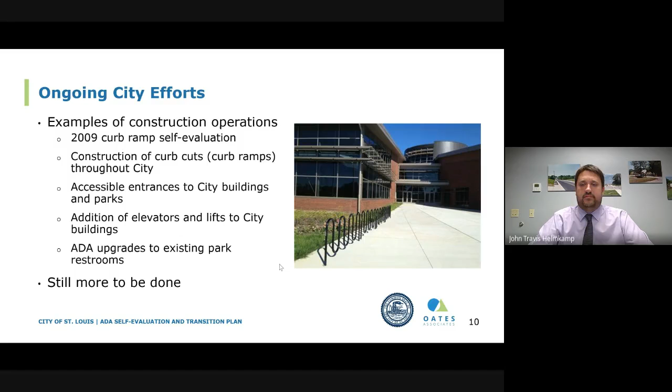The current city self-evaluation efforts too are very important, that we look at the transition plan as it covers, and the self-evaluation as it covers all aspects of the city government. The ADA transition plan covers all these aspects and also puts in place solutions to creating accessibility.

One of the things we wanted to do too, recognizing the great work that had been done in the past by David and others, is to consolidate all the past ADA efforts as well as develop new guiding documents so that future efforts done by the city would be able to follow one single code for accessibility, and that would incorporate local as well as federal and state code into one code, so that it would be predominant for everybody to follow throughout the city. Next slide.

Right now, we've so far been able to do a partial self-evaluation of the city programs, activities, and services, which is covered under the ADA, that the Title II entity or city government must be looking at. I think you can respect and understand the breadth of what that would be across all the programs, services, and activities of city government.

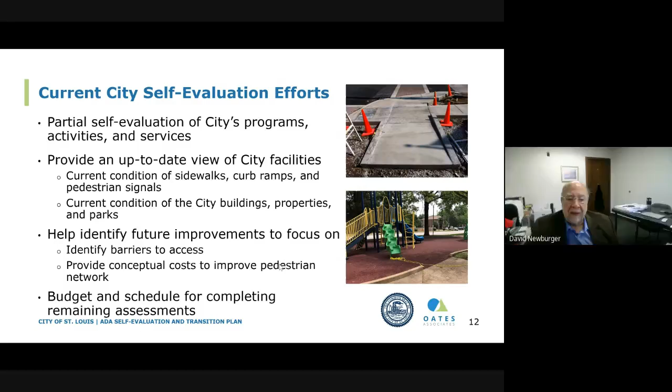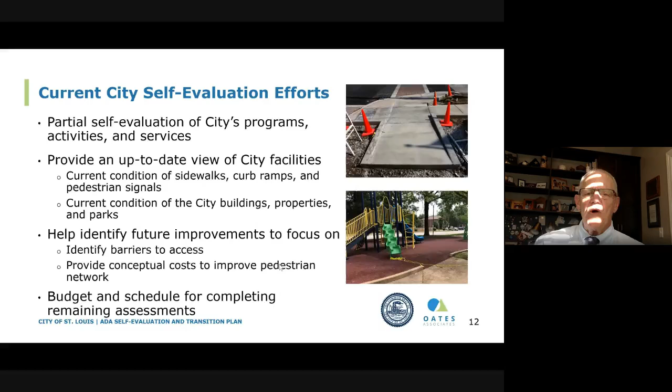Any other questions or comments at this particular time? I think at this point I'll turn it back over to Travis. Okay, thank you very much, Jim.

We've spent a lot of time so far talking about how this is going to be a long-term process, but one tangible aspect we're really looking at is, as stuff is being built in the city, let's make sure that it's being built compliant and built correctly. To that end, that's part of the review of city policies, taking a look at the current policies and whether there are changes we can make to have consistent policies across the various city departments.

Ultimately, that all starts with establishing the ADA criteria to determine compliance - what criteria the city will use to determine whether something is compliant or not. One big benefit of that is it gives us an opportunity to look at post-construction inspections, to really look at what was actually built out in the field and make sure the final product matches what was intended.

And this applies not only to city projects, but also to developers. By giving them consistent standards and consistent expectations, it's going to lead to the city ultimately getting a better final product for what developers are building on city right-of-way.

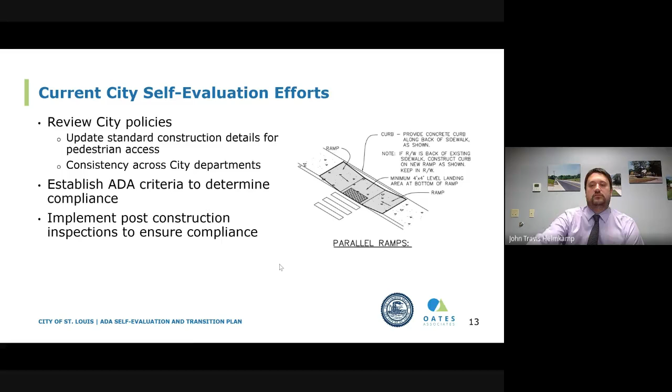Talking a little bit about the pedestrian assets themselves. As Jim previously mentioned, we're only able to survey a portion of those as part of phase 1. But in that portion we're surveying, we're looking at assessing the sidewalk segments, the curb ramps, as well as the pedestrian traffic signals. As part of the 170 miles we've already done, we've completed assessments in every single ward in the city.

We've also focused on getting representative samples of the broad array of sidewalks that exist throughout St. Louis - from heavy pedestrian streets such as Grand or the downtown area, to getting into some of the local streets and taking a look at the condition of the sidewalks along those local streets.

Ultimately, the reason we're doing this is because we're looking to develop a way to score this data, to allow the city to identify which sidewalk segments are having the greatest impact on people's ability to get around the city. The way we're proposing to go about this is a two-part scoring system.

The first part is what we're calling a citywide priorities map. We think this is an opportunity where you can really help us in that development, where really what we're looking at is where people are trying to get in the city. When a pedestrian walks somewhere, where are they trying to go, and also where are they starting from?

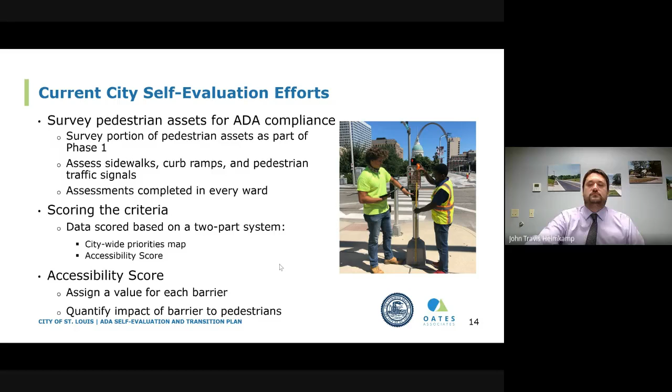Going back to the citywide priorities map for a second, that's based on two different pools of data that we collected. The first pool we looked at was what we call pedestrian traffic generators - areas in neighborhoods that we know people are trying to get to.

If you have the PowerPoint up in front of you, look at the right-hand side of your screen - this is Grand, in the Dr. Martin Luther King area of North City. Highlighted here are some of the different traffic generators that people are trying to get to.

A good example is the MetroBus routes. One thing we've heard over and over, especially from the disability community, is that if I can get access to the bus, I can get access to the rest of the city. So that's one of the key pedestrian traffic generators we're looking at - pedestrian routes along those bus routes.

Another good example of pedestrian traffic generators are city buildings, schools, parks, and especially commercial corridors. Not only is that where people are walking to shop and buy goods and services, but there's also a lot of employment along those corridors as well.

The second part of the scoring system we looked at was socioeconomic data, received from the East-West Gateway Council of Governments. We used that data to identify parts of the city where there is a likelihood that people are walking to get to work or goods and services - really just the possibility of increased pedestrian traffic.

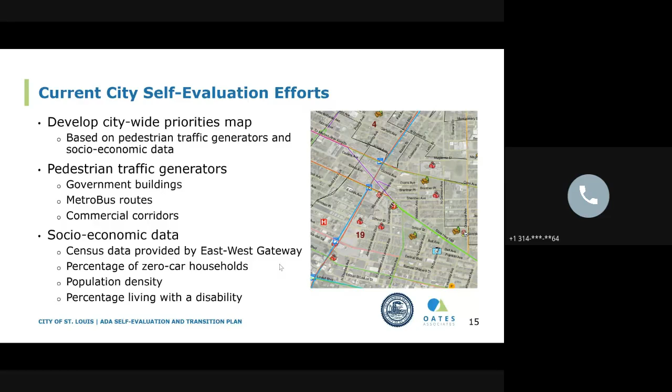When we're evaluating driveways, sometimes there's a tendency to make a big slope in them that goes right across where the sidewalk would be. The technical requirement is that the portion that is sidewalk should be at the same slope as any other sidewalk, which the standard calls for 2% - a very slight slope, enough to get the water off the sidewalk and not tip people over.

All right, very good. One more for now.

So one thing we are looking at is, number one, the minimum width of the sidewalk. We also look at what we call the space, which is the distance from the back of the sidewalk to the face of the curb. The federal government and the city, following those standards, have minimum requirements for those widths, with the goal of providing an opportunity for someone to get as far away from the curb as possible, not only for water but also for general safety.

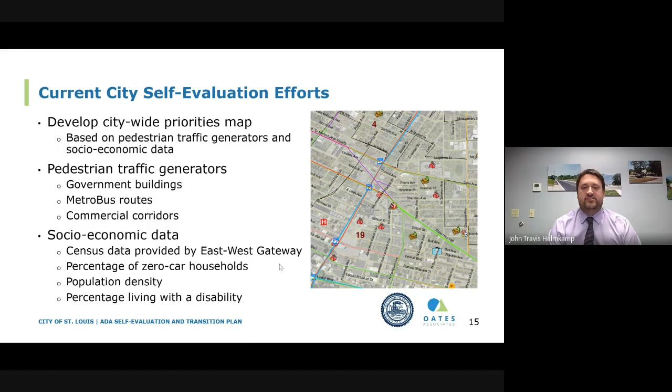Okay, hearing no other questions, we'll move on to the next slide. Again, if anybody has any questions, chat's a good place—feel free to interrupt. Moving on, we're now going to shift over to the city buildings, properties, and parks.

Ultimately, we're only able to look at select buildings. We are focusing on those buildings that we know receive a lot of heavy pedestrian traffic, including City Hall, 1520 Market, community centers, and a couple of the large city parks. Those are the buildings we're looking at as part of phase 1. Again, this is a good opportunity—we want to make sure we're not missing buildings that we know the public uses on a daily basis.

So if anybody has any buildings that they can think of, either they know they have challenges getting into, or that city residents use a lot, we would love to hear from those as well.

Ultimately, our evaluation of these buildings, properties, and parks starts with how people are arriving at the site. That goes beyond just automobile traffic and parking in the parking lot—it also includes if someone is arriving by bus, how they travel from the bus stop to the city building. If someone is using the public sidewalk to get to the city building, how do they access it from that sidewalk? Is there a dedicated sidewalk leading them there, or do they have to use the driveway? Because ultimately, the first step in providing those accommodations is being able to get inside the building itself.

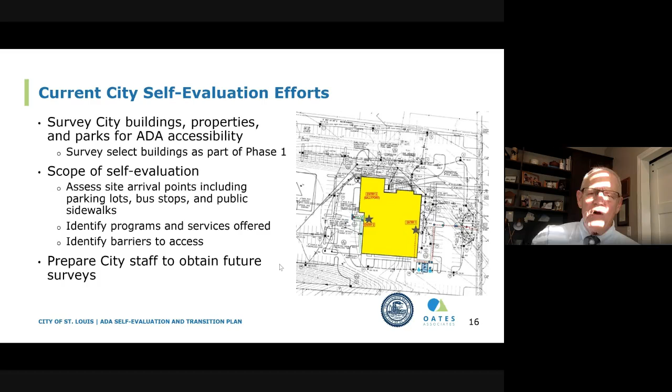Well, and let me add to that, if I may, Jim. When we're talking about our programs, my office will help make sure that everybody gets access to something, so we don't have to wait—that's today's stuff. If, for example, somebody is having trouble getting a audio bill, and they let us know, we would work with that agency. If somebody is holding meetings in buildings that you can't roll into, we would seek that they change where they put their meetings, and we would have a direct conversation right now. So we want everybody, even though we've got all this physical stuff to worry about, to be fully involved and have the full opportunity within the community.

Thank you, Travis. And I think really that's one of our key goals for today, is that you guys, as those neighborhood leaders, know that the Office on the Disabled is ready and certainly willing to assist the residents of the city to get access to things like that. And really, it's not only talking about the ADA transition plan, but also a bit of education on those programs and services that are available to city residents.

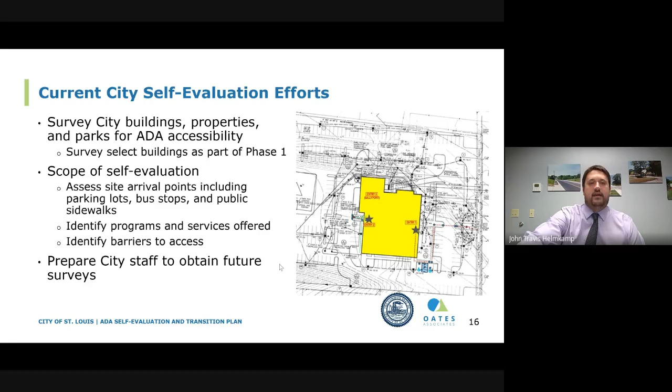To close up the building part of this, the last key step is to prepare city staff to really start to execute, to identify what I'll call low-hanging fruit: are there things that can be relocated to provide more accessibility while we work towards that ultimate goal of complete accessibility? So that these reports can be used as guides moving forward to really start to increase accessibility throughout the city. And with that, I will hand it back over to Jim.

Yes, and I think you can all respect and understand now the breadth of the plan that we're trying to put together. And obviously, what we need to do is be aware of what our next steps are here. We've gathered data from the various buildings. We've gathered data from programs and input from the disability community and other important players in the city, as we are doing today with you.

And also we're gathering data to look at finalizing a citywide priorities map for the city to be able to look at, establish a budget and a schedule to complete that self-evaluation, which really is an ongoing process, as I've indicated, and to identify a potential project to really kickstart the elimination of these barriers and increase accessibility so that citywide people are aware of what we're doing here with the leadership from David's office and Eric's office. We want to put this all together into one neat package as we're moving forward.

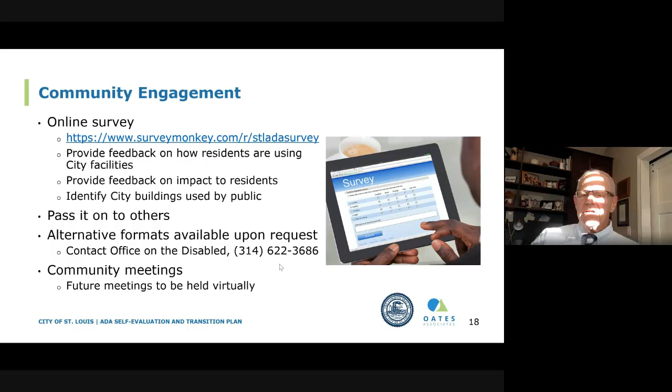And I would just say that it's not just us. I mean, the mayor's office is what's given us the power to do this. Correct. I failed to include that, and I apologize.

So from this point, where do we go? Well, we have an online survey, which you can see listed right there. We encourage anybody and everybody to please input to this. This is a chance for the community to give feedback back to their government, and we're excited by it. Personally, I know the disability community has responded greatly so far, but we want to hear from all aspects of the community, because we recognize, as the ADA did, that disability is not a singular event. It's a family event. It's a neighborhood event. And so we're very encouraged that you're listening today.

We hope you will encourage your communities to take advantage of the survey and provide feedback to us on how residents are using these city facilities. I think it's an exciting time personally for myself being involved, along with David, with the ADA for the past 30 years, that we're now getting great input from the community to be able to put this all together. So please share this with as many people as you can. Take advantage of this survey. And if we need to share it with you in a different format, please let us know. But pass it on to others.

There are alternative formats available upon request from David's office, the Office on the Disabled at 622-3686. And there will be future community meetings that we'll be holding. Obviously, with current conditions today, we'll be holding those virtually in the future. But we really appreciate all your time today. We hope you are encouraged by this as we are, and that you will distribute this as broadly and widely as you possibly can. So I thank you for your time, and I turn it back to Travis and David and Eric.